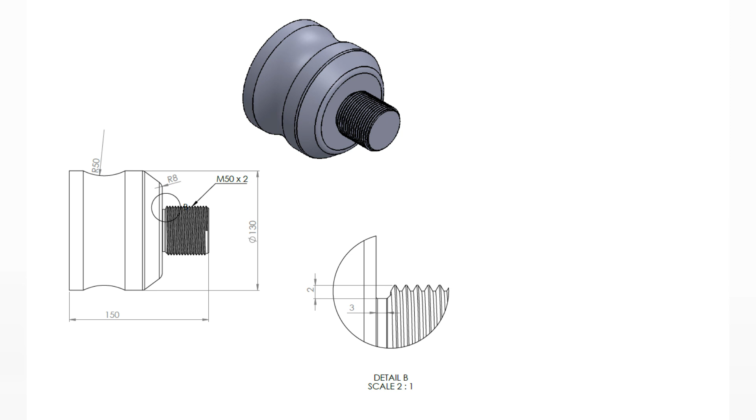Hello, this video shows how a part is programmed in CAPSturn. We will see how CAPSturn helps you easily reduce cycle time, generate shop documents automatically, and generate CNC programs. Our sample part has 5 operations: rough facing, rough turning, finish facing, finish turning, and threading.

We first select the workpiece material, which can be from a generic list or from a material standard. We then define the safety area around the workpiece. This helps CAPSturn determine the shortest path with automatic collision avoidance. We then specify the part number and name, operation number, etc.

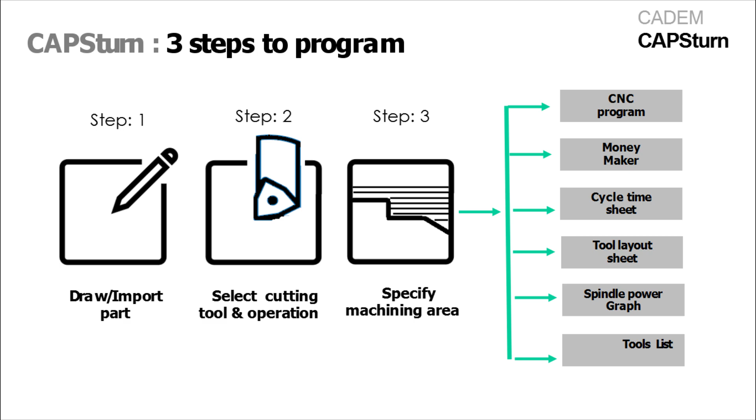Doing an operation in CAPSturn is very easy. It involves only 3 basic steps. Step 1: draw the part and the blank. Step 2: select the tool and the operation. Step 3: tell the tool where to do the operation.

In step 1, we will draw and define our workpiece. We will import the part and the blank shapes from an existing CAD file. They can also be drawn in CAPSturn's inbuilt CAD. We now tell CAPSturn which is the part shape and which is the blank shape.

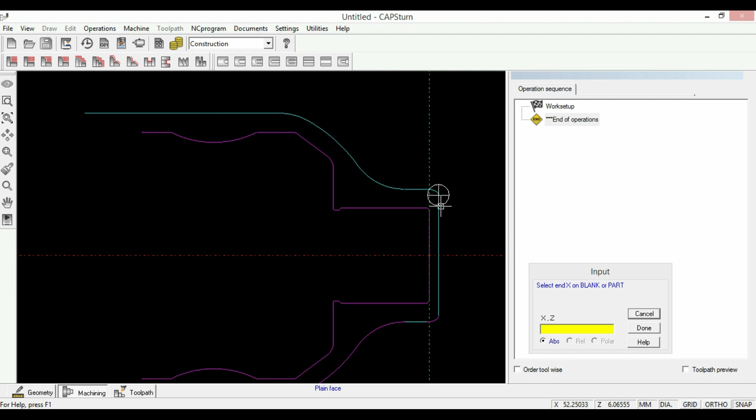In step 2, we now specify the tool and the process. Select the operation. Select the proper tool. In step 3, we tell the tool where to do this operation. Just click the start point and the end point of the area to be machined. Cutting parameters and various other parameters are selected automatically based on the operation, workpiece material, and tool.

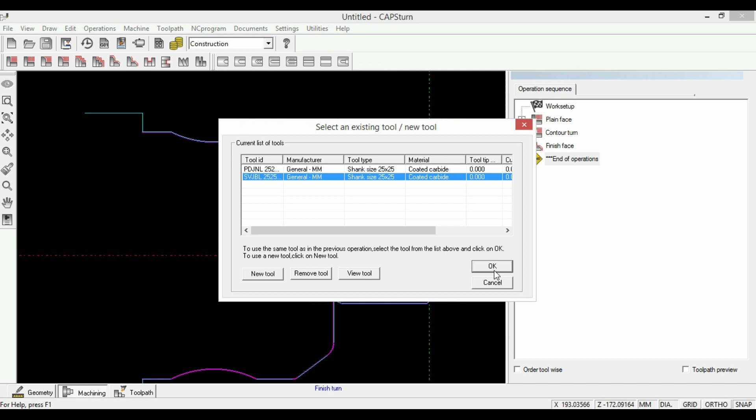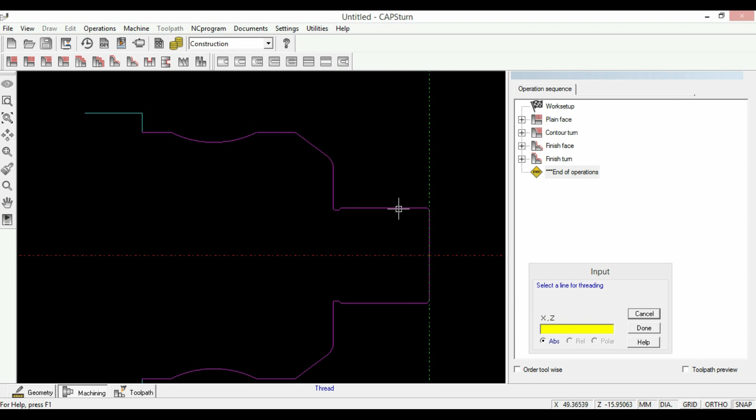We then add more operations in the same manner. Select the operation, select the proper tool, specify the machining area. In threading, all you do is select the type and the size of the thread. The depth of the thread is determined automatically and used to determine the number of cuts and first depth of cut in the threading cycle in the CNC program.

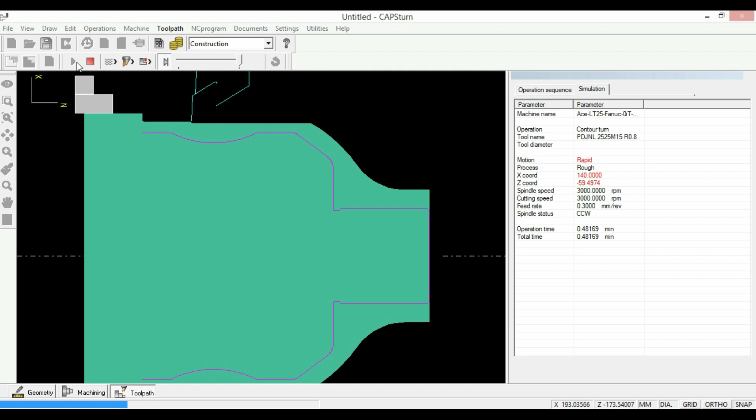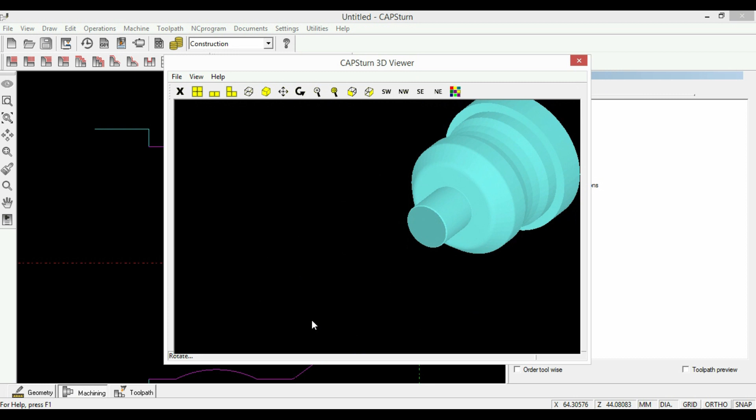Now we will check the toolpath simulation for any problems like collisions and gouging. The simulation shows that the toolpath is fine. We have done 5 operations. Notice how easy it is to use CAPSturn. Just watching this video, you probably already learned how to use it. We can see the 3D view of our part. We now select the machine on which we want to cut the part.

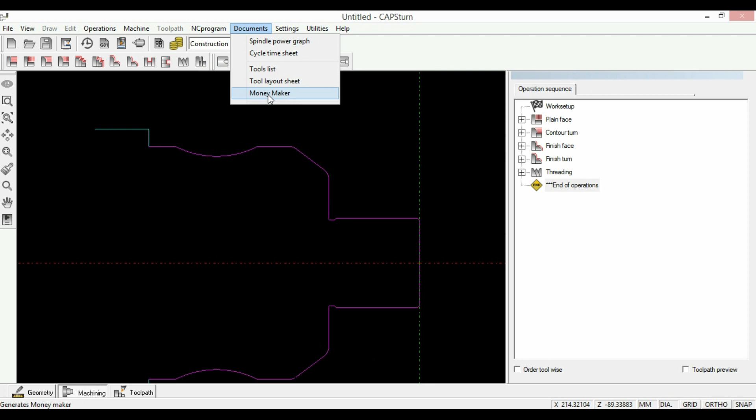Now we'll see how we can reduce the cycle time and machining cost using the Money Maker feature. This unique feature helps you to reduce your cycle time and machining costs. This table shows all operations, their tools, cutting parameters used, power consumed for the operation, and the power available on the machine. It shows the cycle time and machining cost of each operation. It also shows the total cycle time, the weight of chips generated, machining cost, etc.

Let's see if we can reduce the cycle time by using the spindle more efficiently. The table shows that the second operation takes the most time and is the most expensive operation. The cycle time is 14 minutes 55 seconds and the machining cost is 73.6 rupees. We have 14.8 kilowatt power available, but we are actually using only 3.1 kilowatt, seriously underutilizing the spindle.

To use more cutting power and reduce the cycle time, we can increase cutting speed, feed rate, or depth of cut. Here we will increase the depth of cut because this has the least effect on tool life. You'll notice that the table also shows the maximum depth of cut possible with the tool holder and insert that we have selected. Let us increase the depth of cut to 6 millimeters. The spindle power required is more than available. You can see that it is highlighted in red to indicate the error.

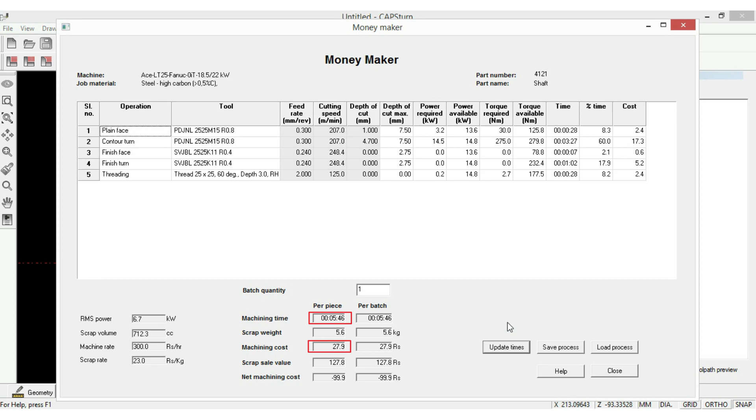Let's try a smaller depth of cut. This is too low and we can still increase it a bit. This is the correct depth of cut. You can see that the required power is just less than the available. We have reduced the cycle time from almost 15 minutes to 5 minutes 46 seconds and the machining cost per part from 73.6 to 27.9 rupees. That is a reduction of 62% with just a couple of minutes of using the Money Maker. Now you see why we call this feature the Money Maker.

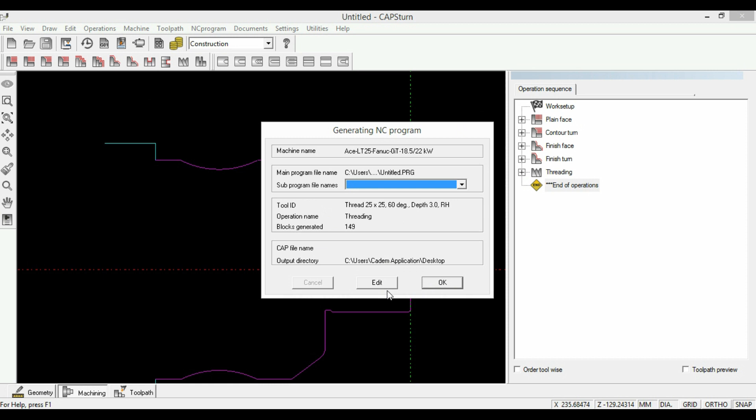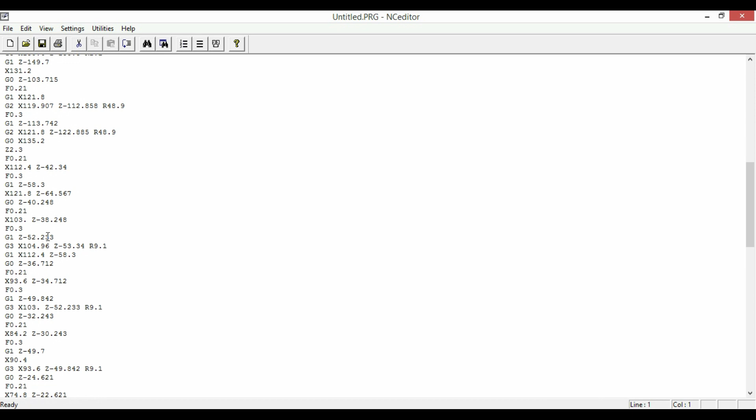Money Maker also gives you the scrap sale value and the energy consumption, so you get an accurate machining cost. You can now generate the CNC program. This program does not require any editing and can be transferred to the machine and cut without any dry run or single block check. CAPSturn's auto collision avoidance and auto gouge prevention ensure that your part will come out first time right, without any trial part rejections.

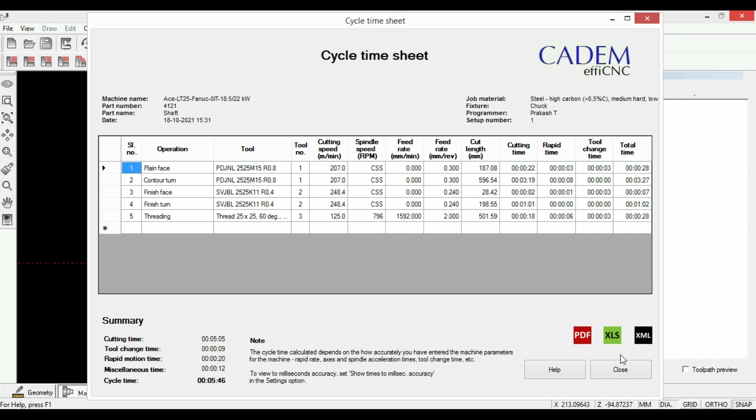We'll now generate shop documents that can be filed for future reference or given to the machine operator. The cycle time sheet shows us the overall cycle time, cutting time, air cut time, tool change time, and other miscellaneous times like chuck open close. CAPSturn generates cycle time very accurately, ensuring that you will be able to make very accurate job quotes to your customer. All documents can be exported to PDF, XLS, and XML formats.

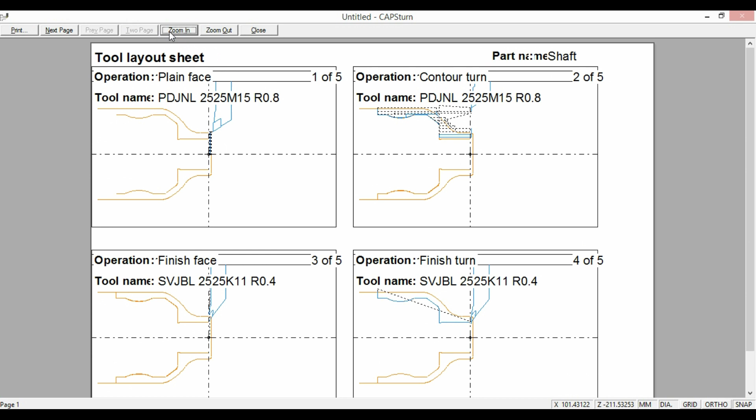The tools list can be printed out and given to the machine operator. The tool layout sheet shows the tool path and tool in each operation. It can be printed out and given to the operator to understand how the program works.

This is a rather complex part and it took us just 5 minutes to generate a program with a low cycle time and to generate shop documents automatically. You do not need to know any programming and you can learn how to use CAPSturn in just 4 hours. This is the power of CAPSturn.